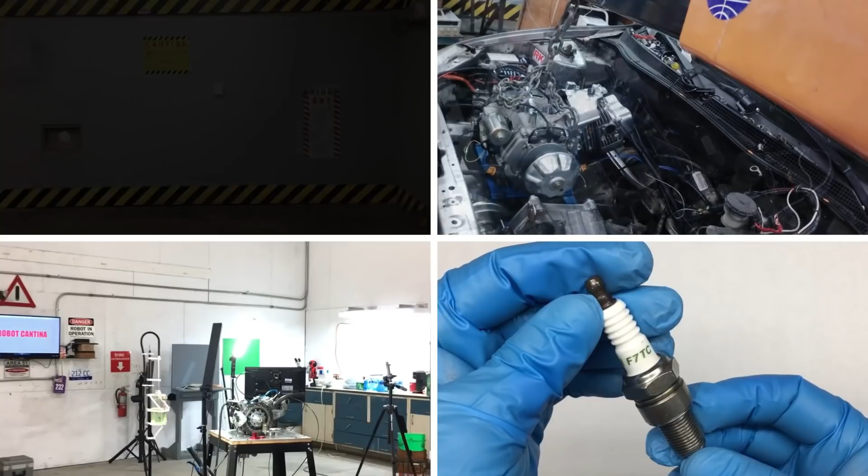So apparently you made it back to Robot Cantina. Kind of puts the pressure on me. Great. All right, roll camera 5 and action.

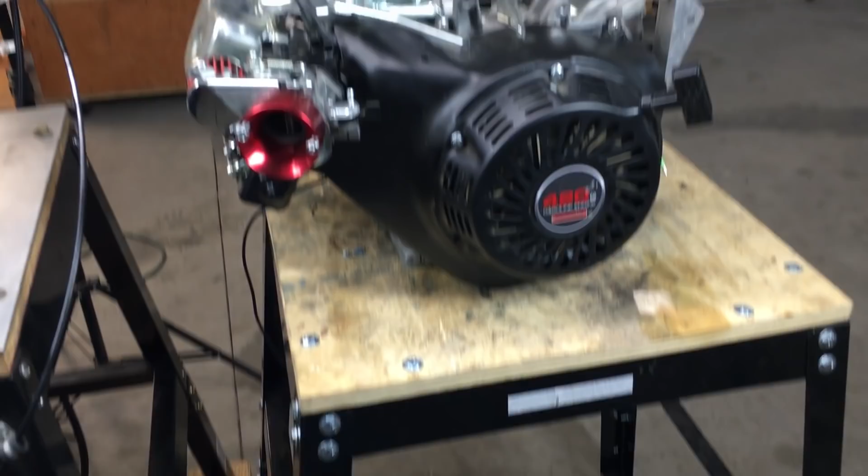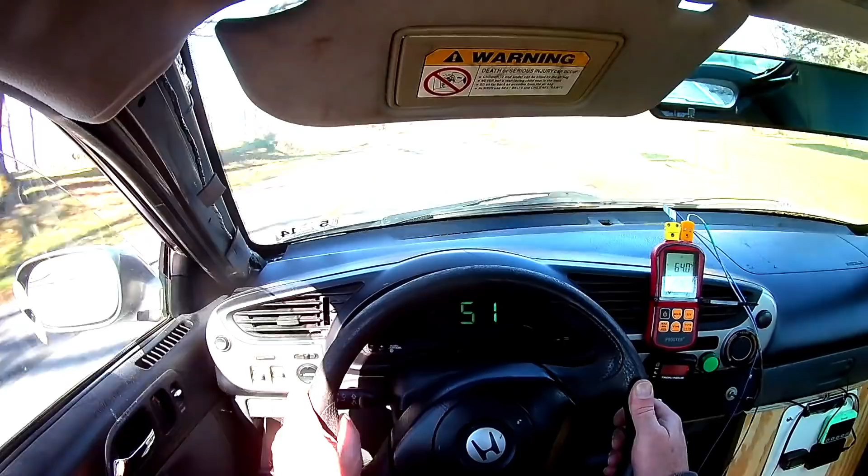So far, the 420 Big Block Predator engine has performed pretty good, all things considered. But how does it compare to a modified 212cc small block that we built and tested in episode 7? Well, a lot of people have asked for the dyno numbers, and I'm curious myself. So today we're going to roll back the clock and take a look at the little 212cc engine that got our street legal go-kart up to 54 miles per hour.

You see, we assembled the engine and immediately installed it in the car and did a series of road tests. The short story is we managed to meet and exceed our 50 mile per hour goal with the little engine, and then we moved on to the 420 Big Block.

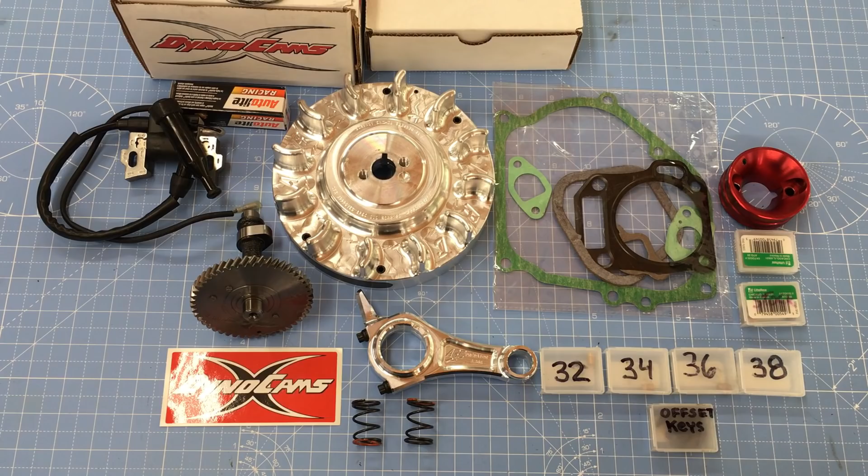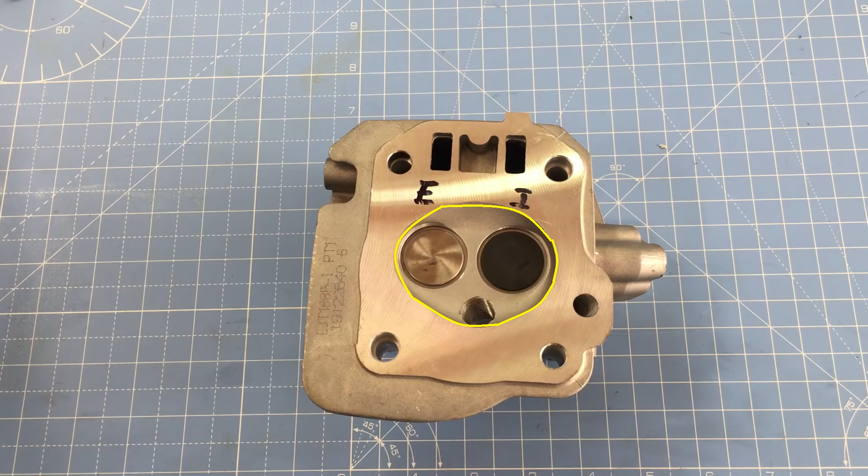So way back in episode 7, we put a modified 212cc engine together with some select off-the-shelf components, like this ARC billet connecting rod, a performance camshaft, and stiffer valve springs. Now for the cylinder head, we used a genuine Honda unit that has a smaller combustion chamber for a boost in compression, and the valves were quality aftermarket stainless steel units. We topped off the engine with a genuine copy of a Mikuni VM22 carburetor.

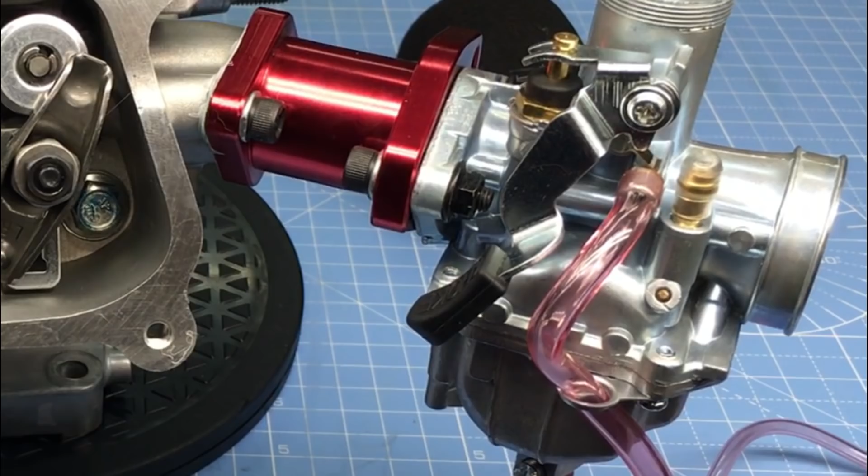These carbs have a 26mm throat, and at wide open throttle there's no restrictions like in a typical butterfly type throttle. Of course, we jetted the carb and bumped the ignition timing for maximum effect, and the details can be found in episode 7 if you're curious.

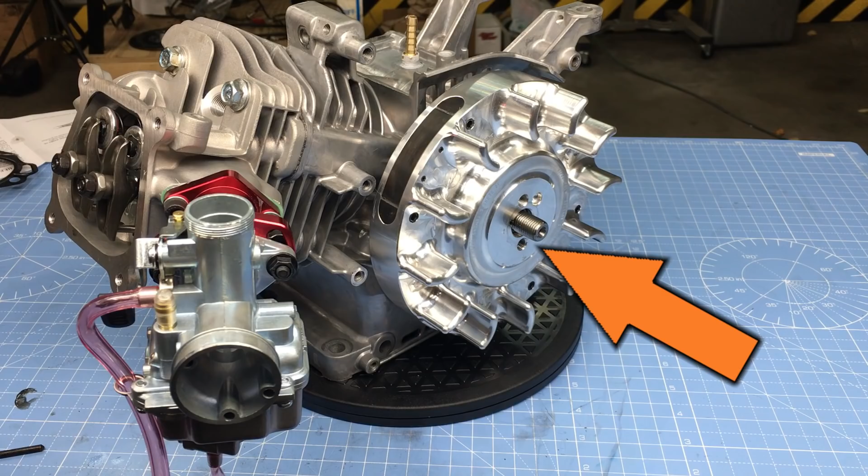Now the engine was originally built to be indestructible, and that's why we chose the ARC billet flywheel. However, for our application, the flywheel with its integral cooling fans couldn't keep our small block 212 cool enough when running 100% full power for long periods of time. Now, I'm sure the flywheel would be fine for a go-kart or a mini bike, but it's not for a 1,400-pound car, if that makes any sense.

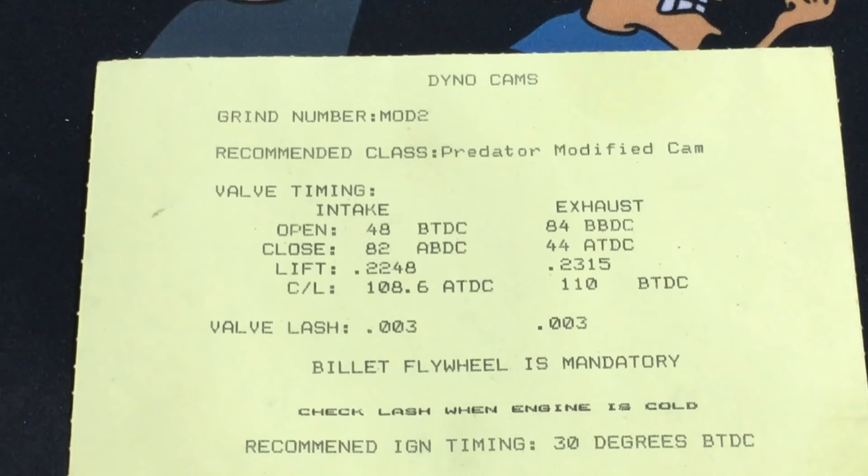So the camshaft was recommended by Dyno Cams after a brief exchange of emails. I don't recall the particulars, but it looks every bit like a camshaft, and for the camshaft crowd, here's the cam card. Now, like I said, there's a lot of folks that ask just how much power did that little engine make. Now, I don't know, but I reckon we'll find out.

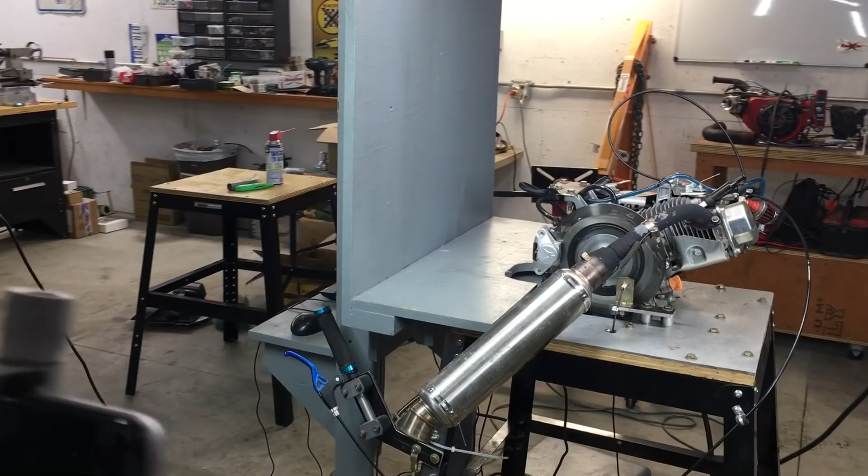So here's the modified 212 engine exactly the way it was in episode 7. We're running a full exhaust and an air filter, but we'll also do some dyno runs without the exhaust and the filter, just for fun. Of course, this is the driver's seat. Not much to see other than I like to keep a robust blast shield between me and whatever is being tested. Now, we've never had an explosion, but you never know.

For simplicity, the dyno's hand-operated, but all the information is electronically captured with a mini data logger and a laptop computer. And again, we'll show you all the parts once we finish the dyno runs. Now, I reckon I should shut up and let's see how much power this thing makes.

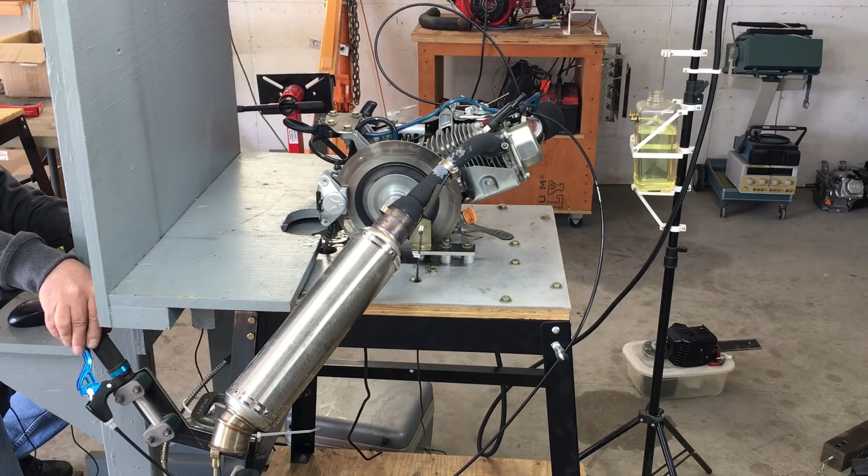Now, we always do multiple dyno runs. Typically 5 runs is more than enough to gather and verify data. Of course, we won't show you all the runs, but the camera is always running, just in case the engine explodes. Let's see if removing the air filter has any effect.

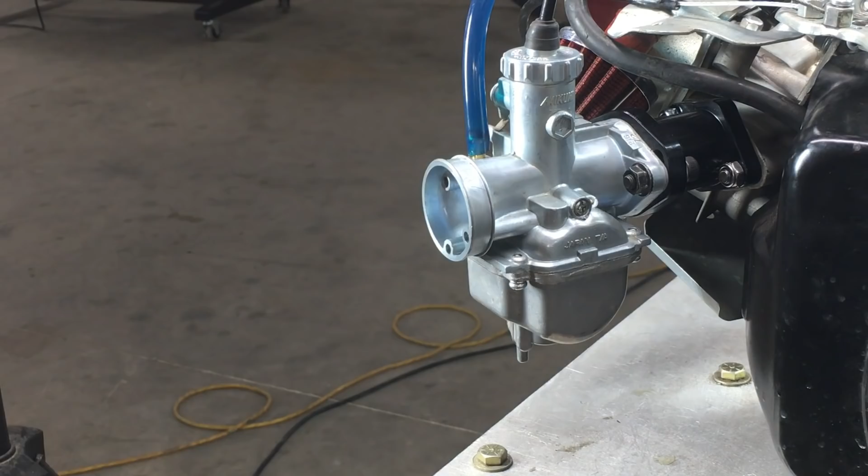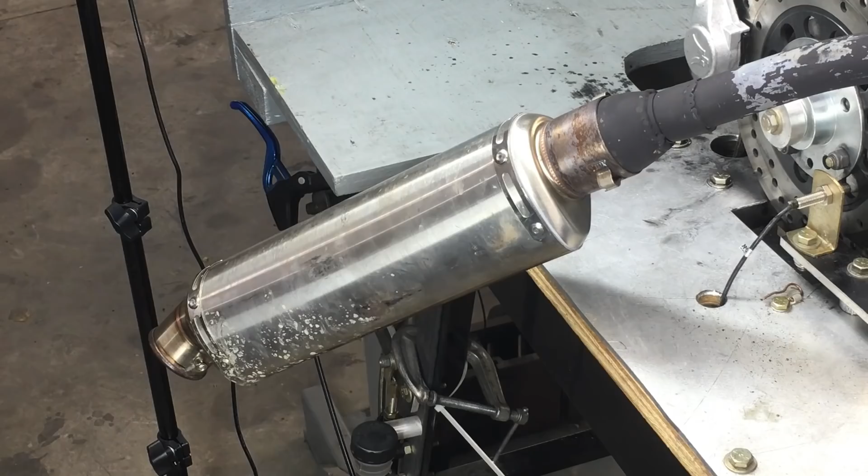The smoke you see is the blow-by coming from the crankcase breather. And here you can see at wide open throttle, the counterfeit Mikuni has no restrictions to impede the flow of air. Okay, let's remove the muffler. Ooh, hot, hot, hot.

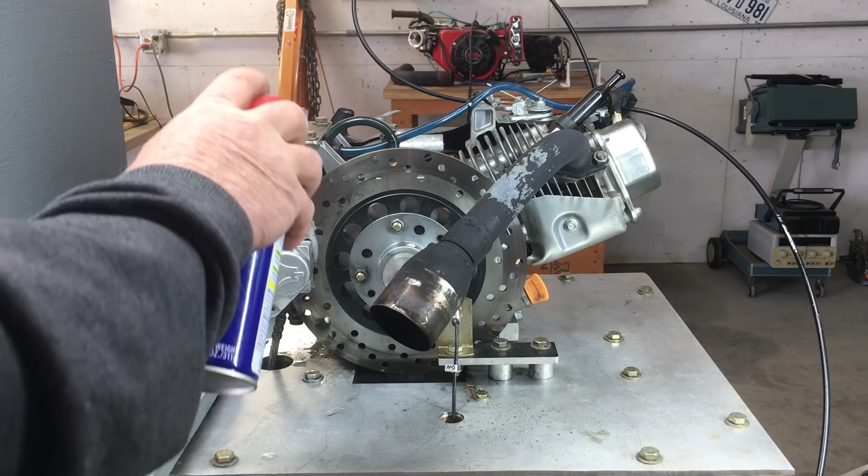Now I'm going to share a trade secret. The brake pads get a squirt of WD-40 between runs. Now, it seems counterproductive, but this helps to smooth the engagement of the brake. The WD-40 burns off after a handful of runs.

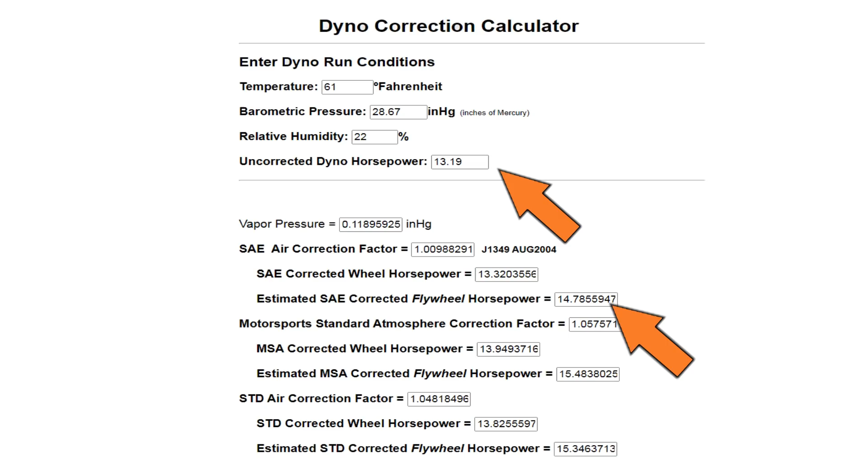Now both the torque and the horsepower come in kinda soft on the low end, but build rapidly and drop off somewhere off the chart. Yeah, I know I could rescale the chart, but I'm lazy and this engine's clearly a screamer. Oh, I guess I should mention we're looking at raw dyno data. The uncorrected 13.19 horsepower translates to 14.78 horsepower when you apply the SAE formula. I don't know, it seems like that's cheating, especially when using a prony dyno that was designed before math was invented.

And yeah, I have to apologize to the metric crowd. All this stuff is in freedom units. I don't know what it is you folks use over there, but no doubt I would get it wrong if I translated it. So you're on your own today.

So without the air filter, the horsepower drops to 12.84. Looks like we lose a bit of power, and that's likely due to the mixture being off. In our case, the filter seems to be causing the engine to run a little bit richer, and as a bonus we get extra power. Now the combination of the jets and the air filter seem right on, and that's not bad given the jet size was more or less a guess. Now the torque drops off a bit, but it's more or less the same with or without the filter.

So in the right circumstances, the air filter can add power if the carburetor is jetted right. Let's look what happens when we remove the muffler. Well, it doesn't look good for our hero. Again, we've lost a tiny bit of power, and again, that's likely due to the mixture. Yeah, the exhaust system directly affects the air-fuel mixture. In our case, it's just a tiny bit.

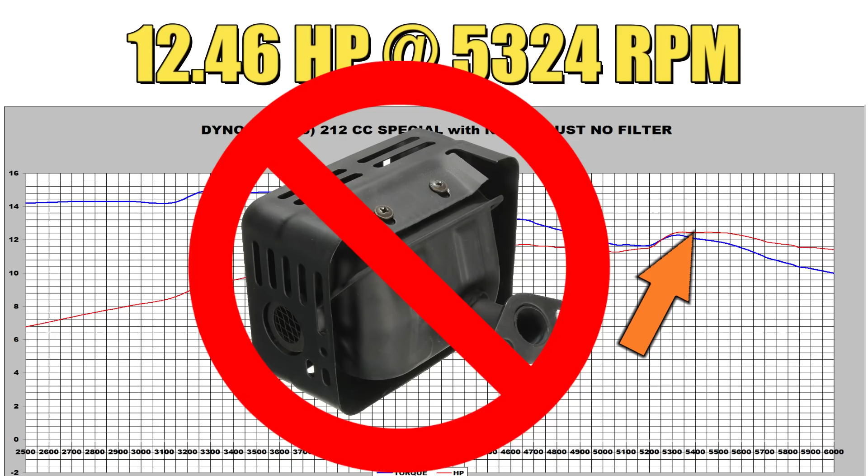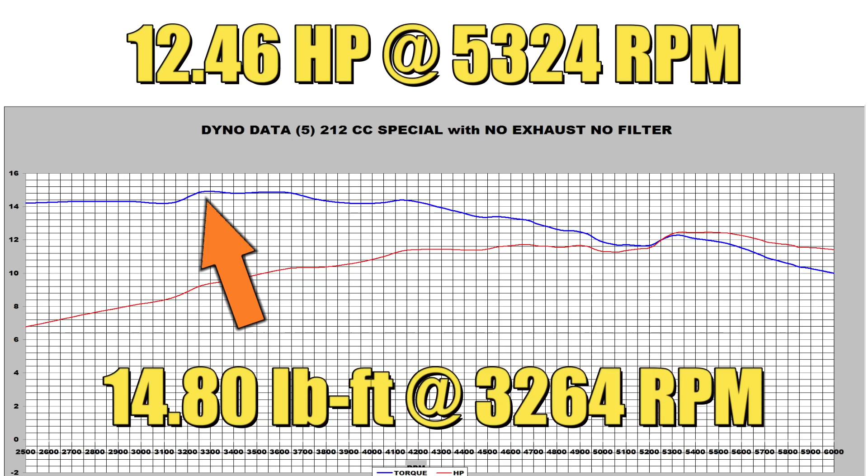But keep in mind, this is not a normal Predator muffler. This is a sports bike muffler, and way back in the day, I do recall this engine ran a lot better with this muffler. And it does a decent job toning down the exhaust note. Now, it looks like the torque dropped off a little bit in the absence of the muffler. Not much, but every little bit helps. So overall, the numbers look good, especially with the air filter and the muffler installed.

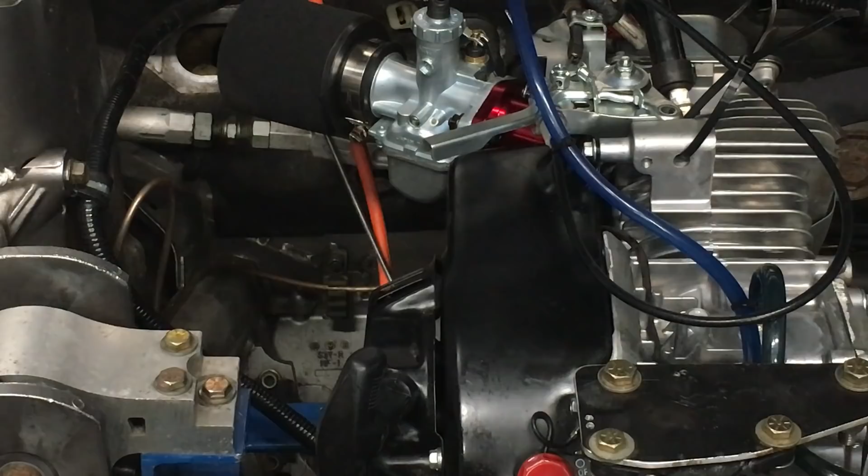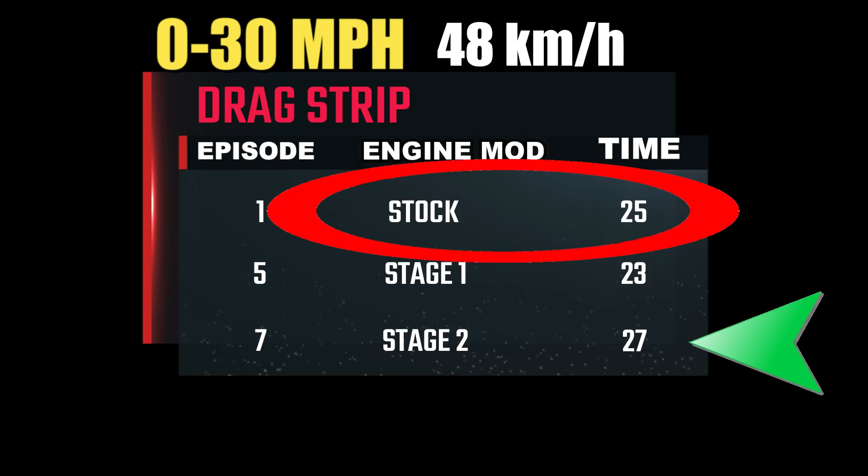And if we go back and review the performance data, this screamer of an engine proved it was a contender out on the Badlands with a 54 mph top speed. But at the drag strip, yeah, this car was a slug. Nope, it couldn't get out of its own way during the 0 to 30 runs. As a matter of fact, the modified 212cc engine performed worse than the stock 212, and in stock form this little engine only makes 6.65 horsepower according to our dyno.

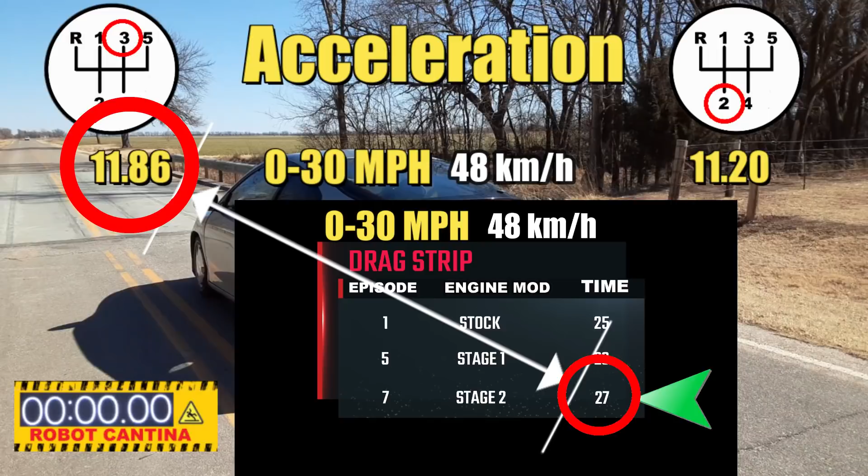Now we've come a long way in development, and just last week we got some remarkable numbers at the New Hillbilly Proving Grounds. The 420 Big Block is essentially a stock engine. Yeah, it has EFI, but that really isn't a power adder. The EFI is basically the same as rejetting the carburetor as far as fuel delivery goes. And the only real mod the engine has is the Speeduino advances the ignition to 27 degrees, which is the same as an offset flywheel key that we used in the past on the smaller engine.

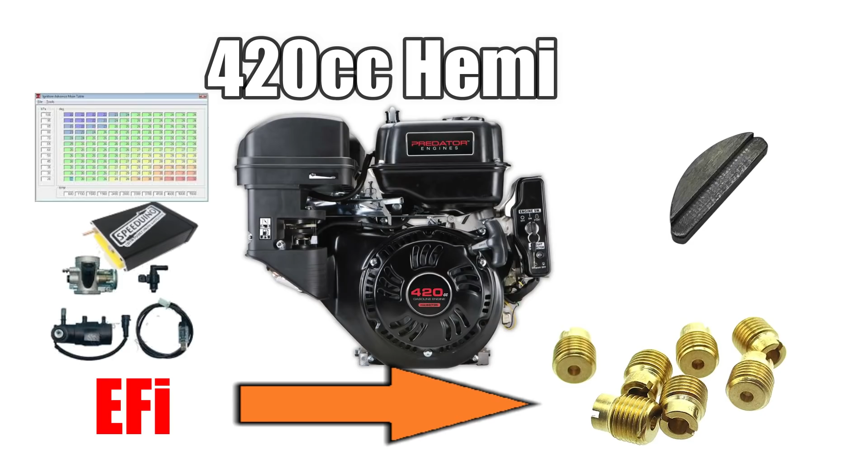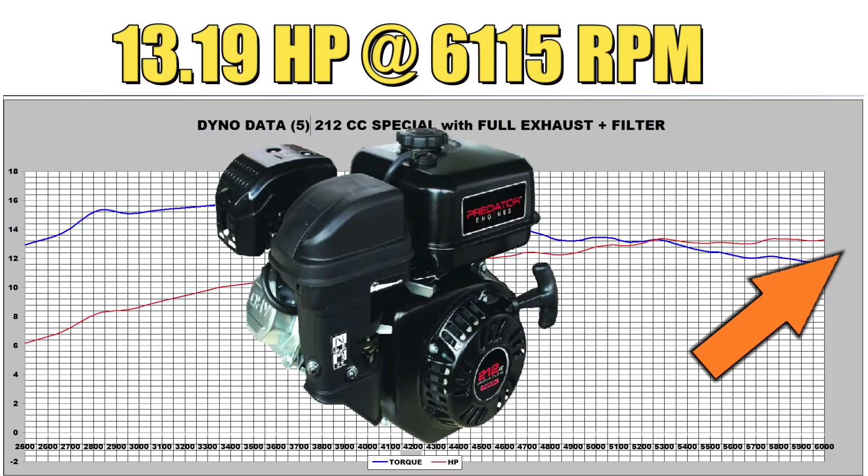I guess what I'm saying is the 420 and the 212cc engine make about the same horsepower, at least on paper. The difference is the 420 makes its power and gobs of torque on the low end, while the 212cc engine makes its horsepower on the top end. Now with the way the car is geared and with the addition of the torque converter, we can take better advantage of the 420's low end power. And that's how we're getting better results.

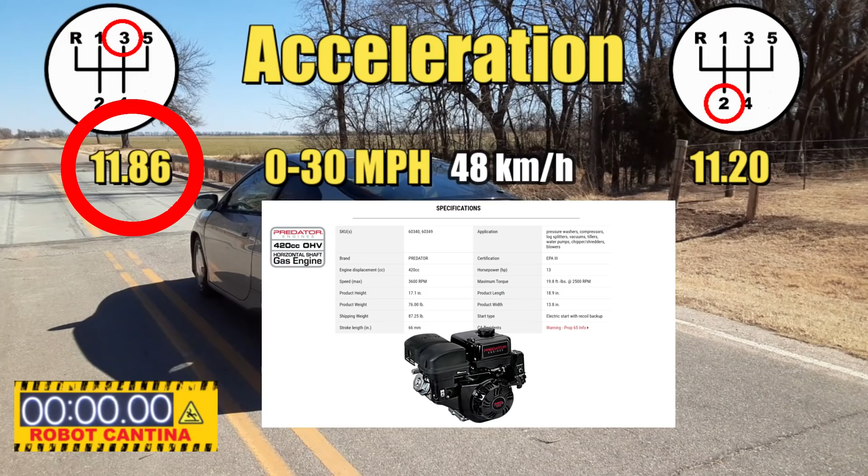I guess some folks may wonder if we could have tuned the drivetrain specifically for the modified 212 engine, for better performance at the drag strip. Well, in episode 10, we sort of tried that. What we tried was a torque converter modification. The idea was to take apart the converter and lighten up its internal weights. The modified torque converter would allow the 212cc engine to wind up so it could make its horsepower on the top end while the converter slowly went through its range.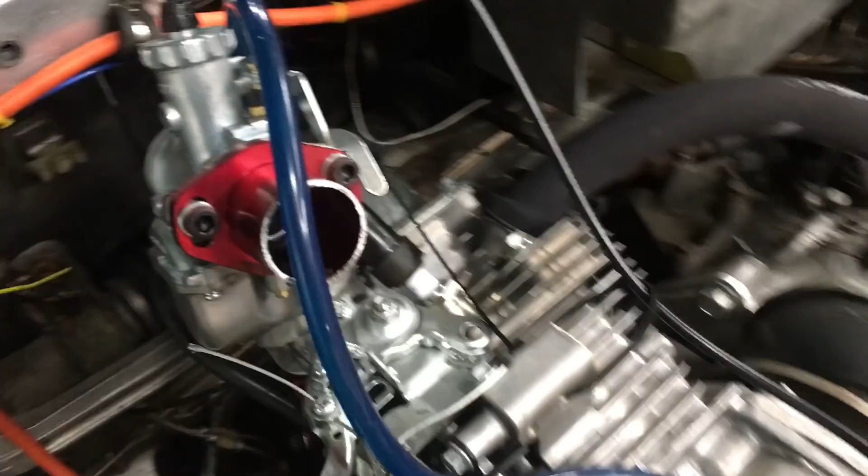Well, what we ended up with was a disaster on the side of the road when the intake manifold broke. Now, the broken manifold had nothing to do with the converter mod, and I hope that's obvious. Nope. The manifold broke because it was pretty much cheap crap sourced from Amazon. Unfortunately, that pretty much ended the 212cc engine experiments because we ran out of time and we were also working on the 420 stuff. So I guess the modified 212cc engine ain't no good for a car, and that's obvious whether it's modified or not. But this engine is a real screamer, and I think it's going to find a home in something more appropriate.

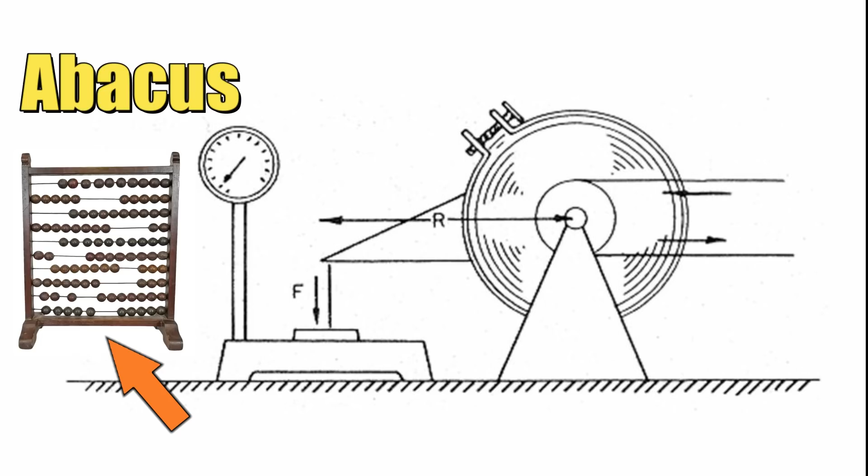So how does a prony dyno work? Well, the simplest answer is just Google it. Let's see, prony dyno. Meh. Oh, here's a nice picture. Okay, so it looks like all you need is a brake, a torque arm, and a scale. Now this picture doesn't show it, but we also need a way to count the RPMs. An abacus, perhaps? Anyway, this thing's made out of wood, leather, and it's nailed together. I think we can improve on this a little bit.

So this is a modern-day equivalent of the prony dyno. Now this gizmo is deceptively simple looking, and at first glance it almost appears like it was made by a hillbilly in a garage with common garden tools. Well, that ain't far from the truth.

You see, I have a PhD. Not one of those. A PhD, a post hole digger.

Tough crowd today, tough crowd.

So anyway, our modern prony dyno uses a disc brake and caliper to apply the load to the engine. Now all I have to do really is push down on this lever to slowly engage the brake while holding the throttle wide open, and we're able to put a massive load on the engine. The tiny caliper is from a 50cc motorcycle, and it has more than enough grip to slow down the engine. And as I showed earlier, we actually shoot WD-40 on the brakes to reduce the grip for a smooth deceleration of the engine. So that covers the brake.

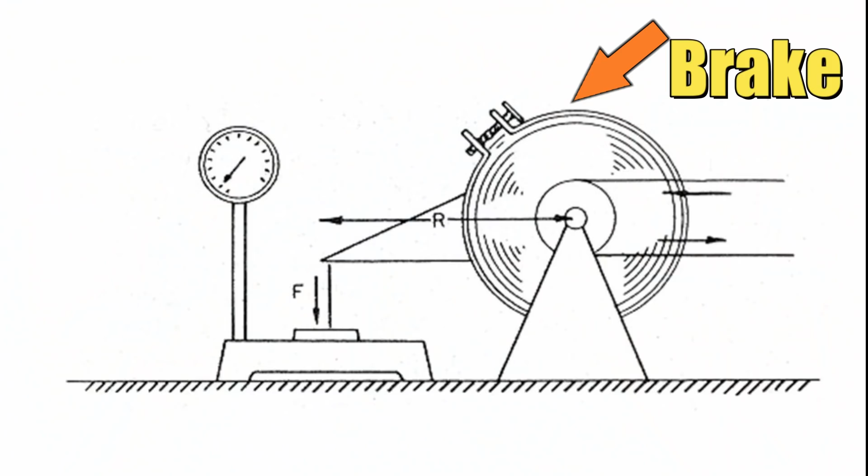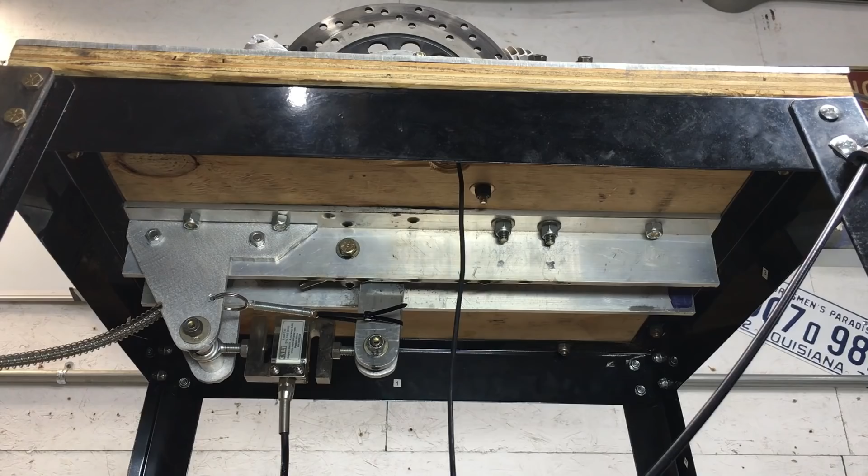For the torque arm, well, we got one, but it's hidden behind all the stuff. So the brake caliper that we just discussed is connected to a hidden torque arm, and if we take a look below the dyno, we can see part of the torque arm sticking out. So that covers the torque arm. And in a moment or two, we will dig deeper to expose the torque arm.

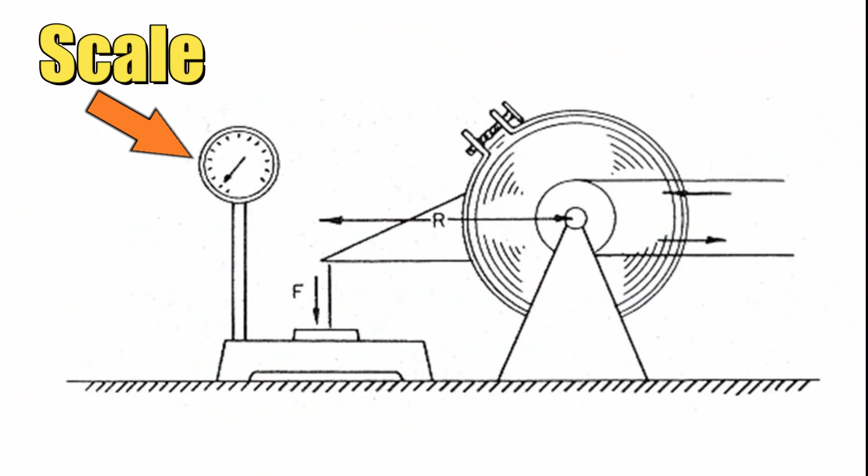So the older prony dyno uses an actual scale to measure force. However, on the modern dyno, we use a strain or force gauge to electronically convert the force into an electrical signal. So that pretty much covers the scale. Now, to measure RPM, we use an inductive proximity sensor, and we count the holes in the rotor as they pass under the sensor. With a bit of math, we can convert that into RPM.

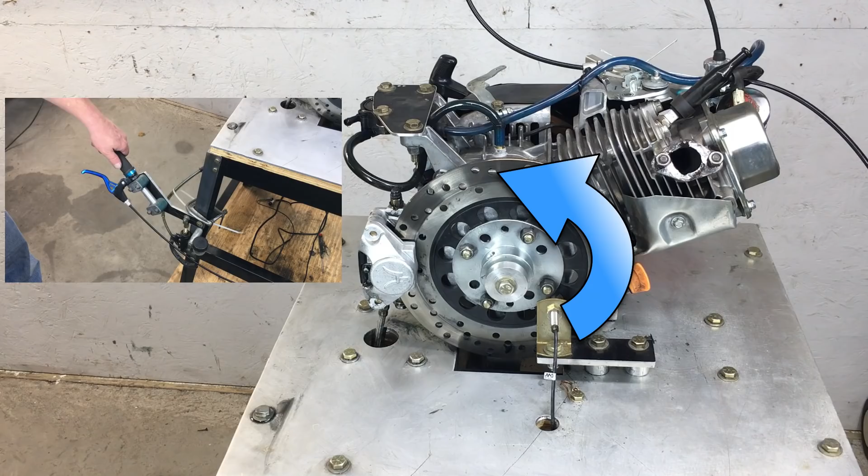So let's go through that again real quick. The rotor is connected to the engine and spins when the engine's running. Jimbo holds the throttle wide open and applies the brake. The caliper squeezes down on the spinning rotor and transfers the energy to the hidden torque arm. Down below, the torque arm, which is connected to the caliper, transfers the energy to a force gauge, and Bob's your uncle. It's just that simple. Now, the whole process is recorded on a data logger, and we can extrapolate the horsepower by using some simple math along with the data we collected.

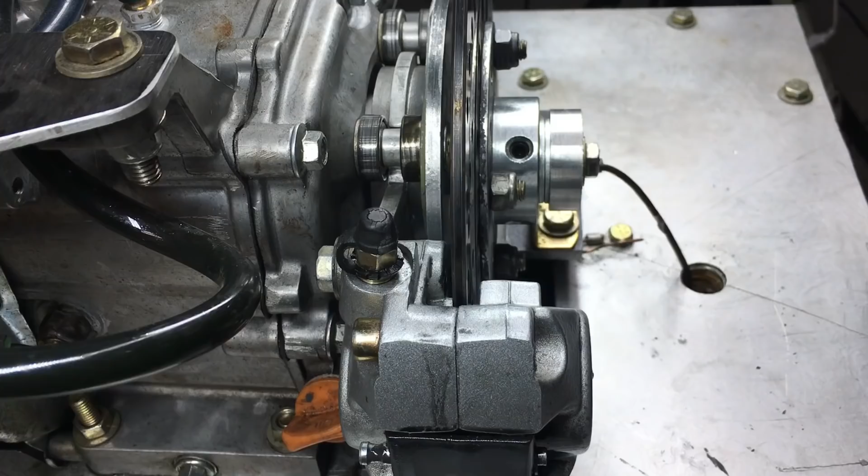Pretty much that's it. Now, no doubt there are folks in the audience who know how a prony dyno works and want to see how the magic happens, and more specifically, how I managed to connect the torque arm, because they know there's literally not enough room to fit all that stuff in a nice little package. So how did Jimbo do it? Well, that's next. So to expose the torque arm, we'll need to pull the prox sensor, the rotor, and the caliper. Give me a moment.

Okay, and guess what? You still can't see how the torque arm is connected, so I reckon more stuff has to come off. But before we do that, let me give you a peek at how it moves. Now, for this quick demonstration, I also had to remove the strain gauge below the dyno. That way I can show an exaggerated movement of the torque arm. Normally it only moves a few thousandths of an inch. Okay, so now we can see the caliper bracket is definitely connected to the torque arm.

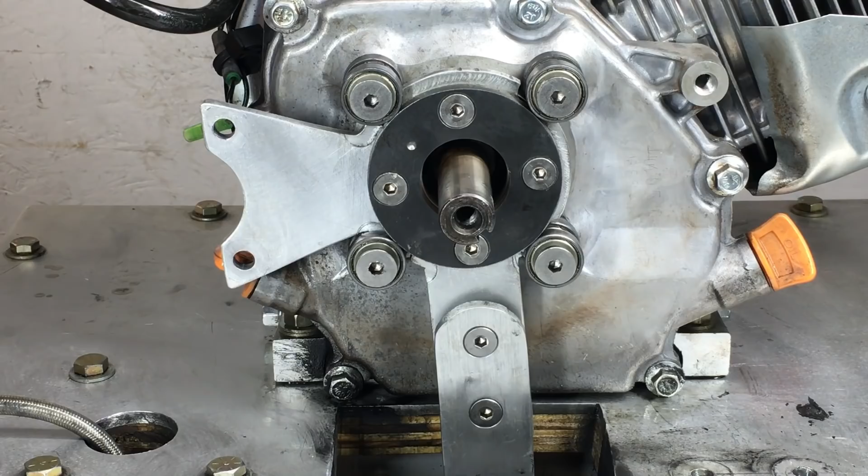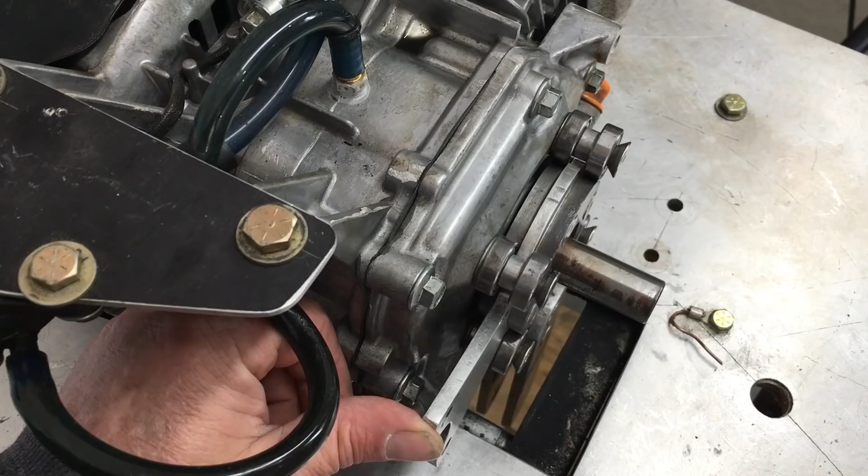So let me remove this aluminum plate. Now this will be a bit of magic because pulling the plate will cause the whole thing to fall apart. So I pulled the plate, and off camera I reassembled all the bits. And now we can see how it works. The trick is the torque arm is suspended by 8 roller skate bearings, and I'm also using the engine block as part of the dyno. So that's pretty much how we do it. The engine block is actually part of the dyno. Pretty clever. So here's another shot on how the torque arm is suspended and how it moves. Now let's put the dyno back together and take a look at the calibration.

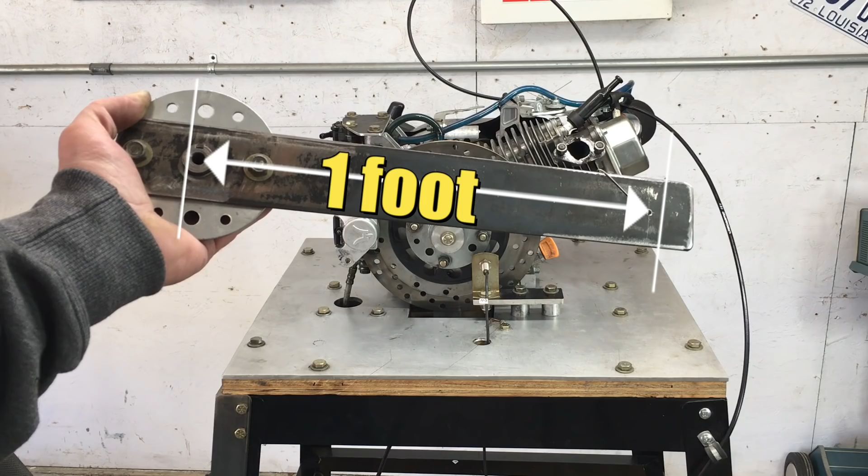So this dyno is pretty much made of random fabricated parts and a few off-the-shelf components. The most important part of this whole assembly is the calibration arm. Now this part is probably the only thing I measured when I built this dyno. So this thing is what I use to calibrate the dyno in foot-pounds. Oh, my bad, and I have to apologize. The calibration arm also has a counterweight that I forgot to install when I filmed this. Normally the arm is balanced when going through the calibration process.

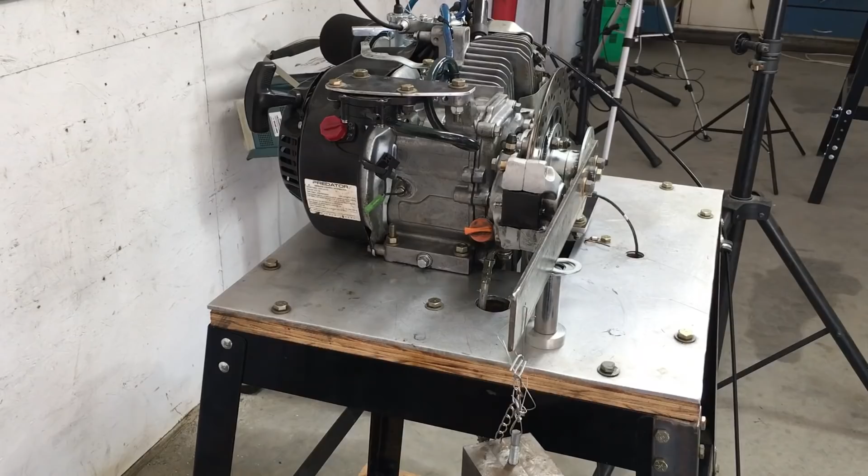So for this dyno we calibrate it to 20 foot-pounds by using 2 10-pound slugs of steel and also a 5-pounder. We do the calibration in a few steps to confirm the load cell is linear, and we do this every time we use the dyno. And here you can see the 2 10-pounders hanging from the calibration arm.

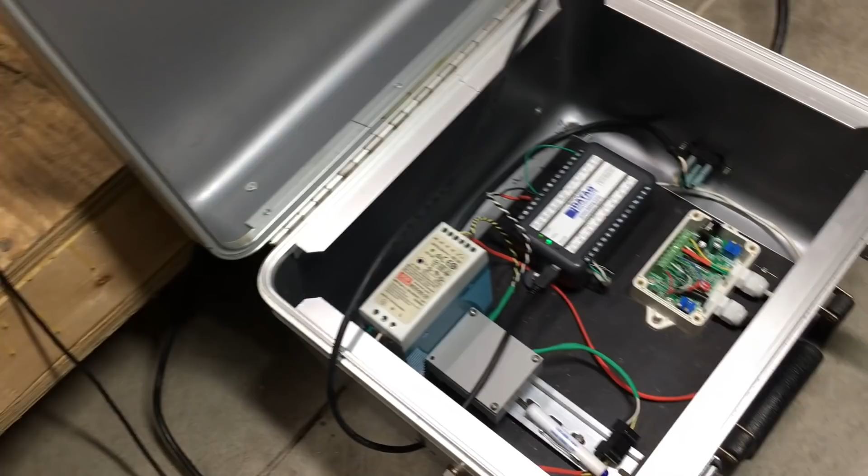So at this point we can take a look at the data log equipment. Looks like we have a 24-volt power supply, an amplifier for the load cell, a signal conditioner box that contains a Zener diode, a few resistors, and a capacitor. Now these passive components clean up the signal from the proximity sensor that we use to measure RPM data. The data logger is a DI-1100, and it's a multi-channel USB front end that converts the signals into something the laptop can read and record.

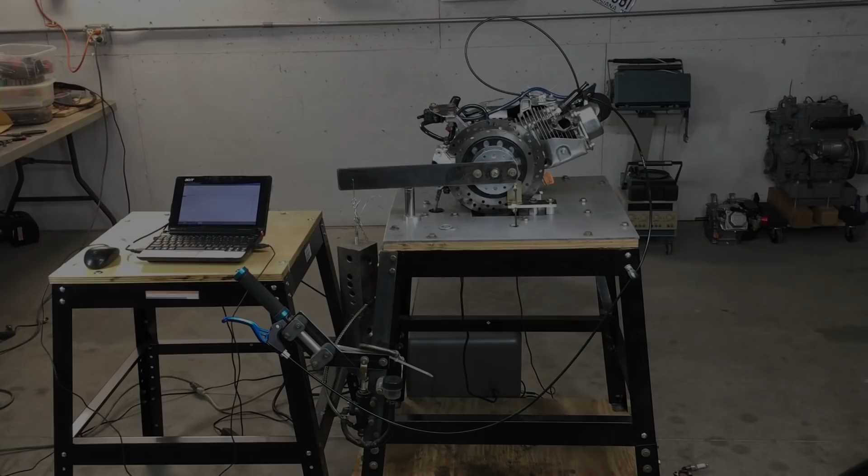It's made by DATAQ. And here you can see the last step in calibration, where we suspend a 20-pounder from the calibration arm and read the raw voltage from the load cell. From this point it's just math, and we ain't getting into that. So that's pretty much it for today. I hope some of you folks found the dyno and how it works to be somewhat interesting.